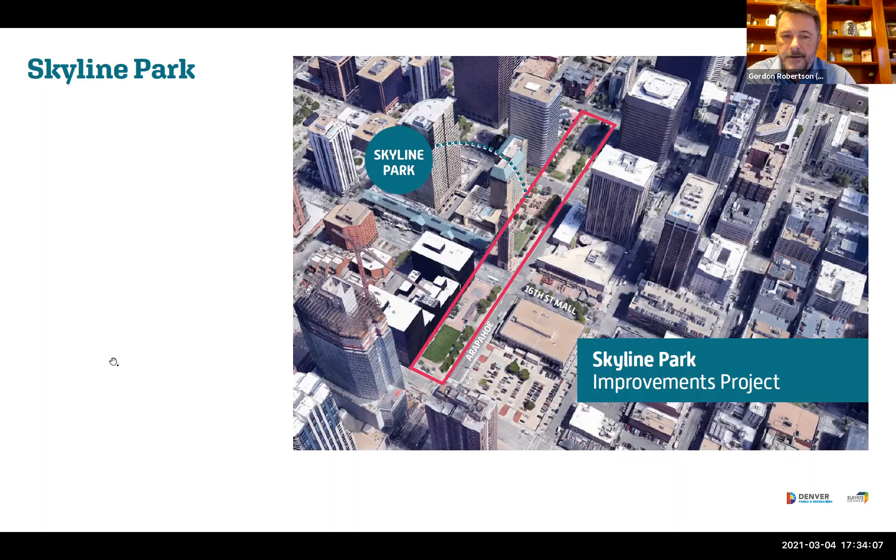When we met in July for the first Skyline Park webinar, we asked you to tell us about what you love and don't love about the existing Skyline Park. We heard from you about what excites you about other urban public spaces in Denver and throughout the world. And finally, we asked you to tell us more about the types of activities and programs you would like to see in the future Skyline Park.

Since July, we have continued to solicit feedback through online and paper surveys. We have conducted additional targeted focus groups to further explore a wide range of program opportunities for Skyline Park. And we have heard you, and our design team has taken the feedback we've received to create a basis of design that has formed the concept options for Skyline Park.

The design team has drafted a series of concept options for all 3 blocks, and we are so excited to share with you this evening the best of these options. The goal for tonight's workshop is to hear from you about what you want to experience on each block of Skyline Park. We will take the feedback we hear from you and other stakeholders we've heard from this week and narrow down the design to a preferred concept option, which we will share with you later this spring at our 3rd and likely final public workshop.

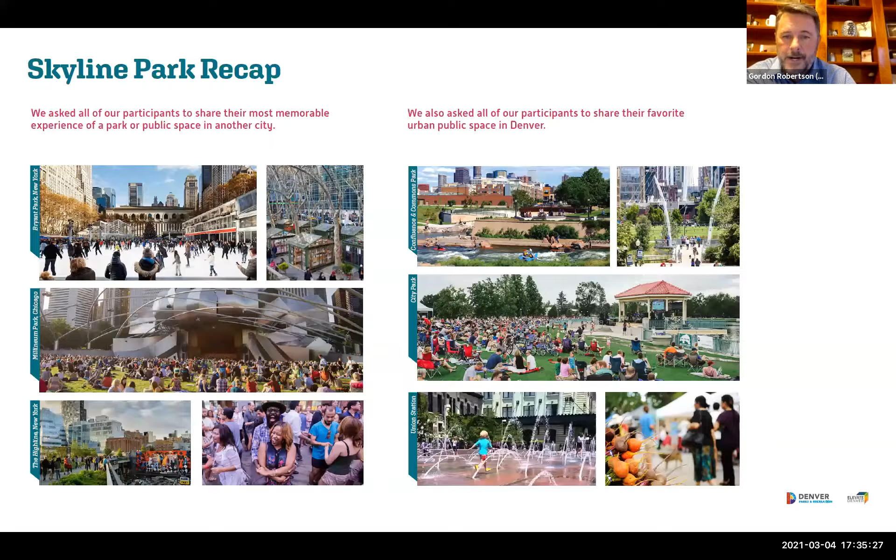Downtown parks are the city's front yard where we come together to celebrate our culture and to enjoy our outdoor lifestyle through play and relaxation. This transformation of Skyline Park is a once-in-a-generation opportunity to reimagine a significant public space within the heart of our downtown. Skyline Park has amazing potential to serve our community as a public space with a regional draw, but also as a neighborhood park serving our downtown community and surrounding neighborhoods. We want to hear from you and thank you so much for being here.

Now let me take a brief moment to thank our project partners without whom this project would not be possible. First off, we'd like to thank and recognize the voters who approved the Elevate Denver bond in 2017, which has made funding for the Skyline Park Improvement Project possible. And we'd also like to thank the Elevate Denver Bond Program, Council District 9, and the Mayor's Office for their leadership in getting us to where we are today. We'd also like to thank Denver Departments of Transportation and Infrastructure, Community Planning and Development, and Arts and Venues who are very much involved in this project. And lastly, we'd like very much to thank the Downtown Denver Partnership and the Denver Theater District for being such great partners on this project with us.

My last thing to do tonight before I turn it over is to introduce the project team. I always start with our fearless leader, Happy Haynes, our executive director. She is the leader of this project in many ways. Also, Craig Coronado and Jenna Harris are our project leads in the Planning, Design, and Construction Division of the department. Laura Morales and Jesus Orantia with our community engagement team in Denver Parks and Recreation are key partners on this. And lastly, and maybe most importantly, our design team, Rios.

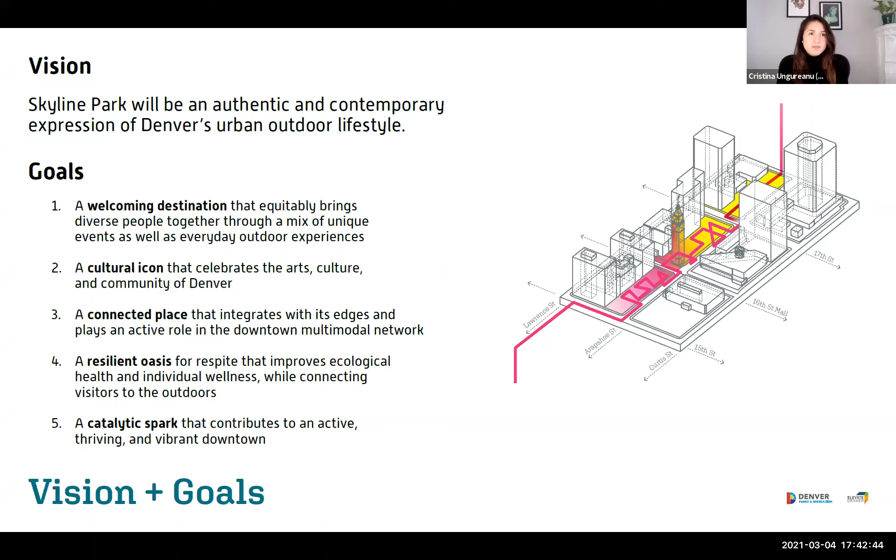So we'll ask ourselves, as we're thinking about a design or discussing a design concept with stakeholders, does this choice serve these goals and in what way? We know different solutions will amplify different goals differently, but in the end, we want to make sure we always come back to this vision and this set of goals as our guiding touch points.

For the future of Skyline Park to thrive, our focus is people. Who uses the park today? How is the user base going to change over time? And then who else can we attract to the park in the future?

From the outdoor downtown plan, we know that Skyline Park currently serves the following spectrum of users: residents, employees, students, visitors. And the map on the right shows the continued growth of office, hospitality, and residential uses in downtown, which is only going to further amplify that dynamic mix of users coming to Skyline Park.

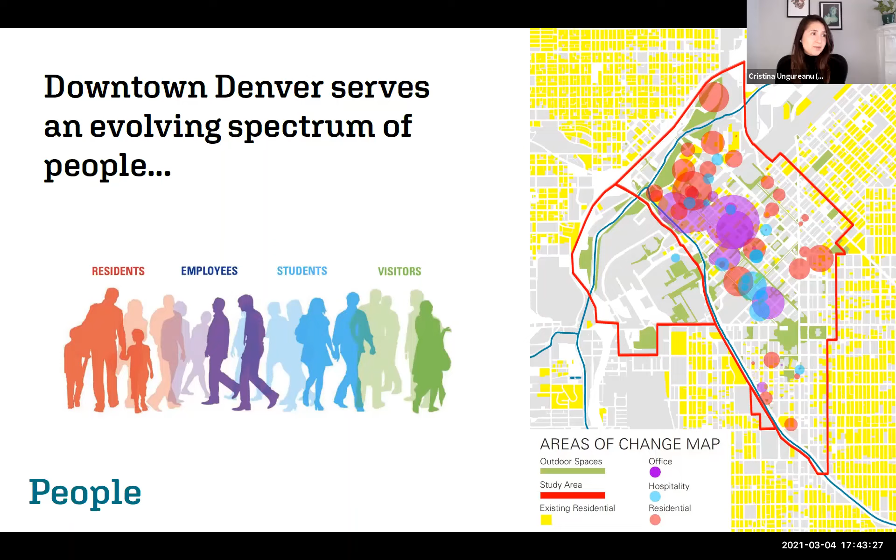We believe that because of its central location in downtown and its tremendous access and proximity to transit infrastructure, Skyline is uniquely positioned to serve a broader user base as one of the only parks in the central business district.

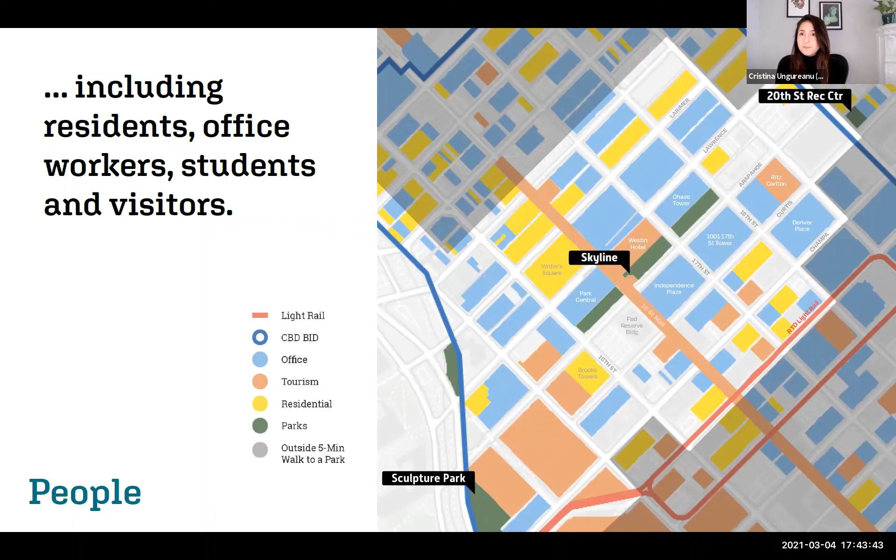We also believe in the role that Skyline Park can play in fostering a more diverse audience. While we are keenly aware that most of the racial and ethnic diversity in Denver exists outside of downtown, the best aspiration we can have as a group here today is to make Skyline a place where everyone feels like they belong.

It's to make that park an iconic experience that you can't get anywhere else. To come to Skyline Park, this audience needs a there, and they need the access and affordability to be able to get there. Even still, we want to recognize that the diversity of the park is going to fluctuate on a daily, monthly, annual basis, while these farther flung audiences are still going to gravitate towards their local parks for their day-to-day needs.

So we talked about people. We also want to think about place. How does downtown Denver set the stage for Skyline's future? We want to think about Skyline Park in the context of all these other great parks in and near downtown that serve a spectrum of user needs and desires.

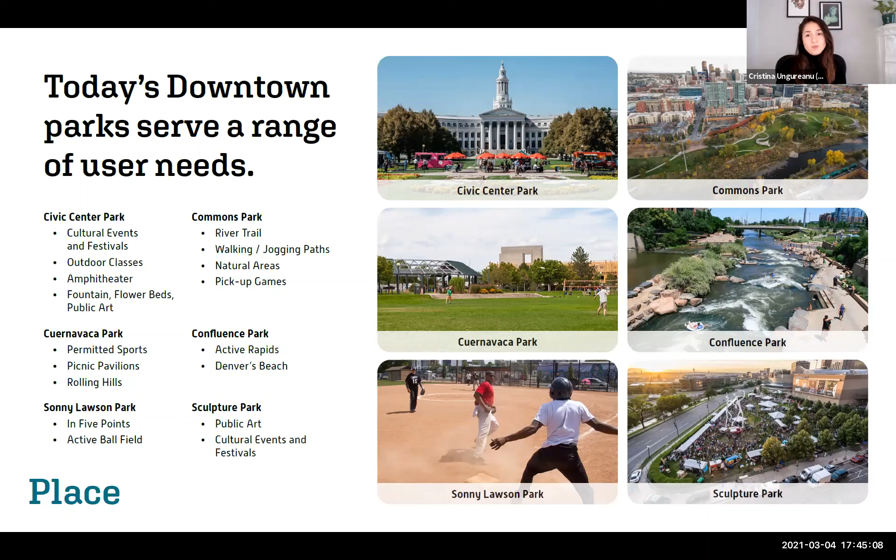From the cultural events and festivals you get at Civic Center to the wonderful waterfront activities at Commons and Confluence, and then to Sonny Lawson in Five Points, which is really the only active ball field in the entire district.

What is missing from this tapestry of open spaces in downtown? We believe one way to take advantage of Skyline's central location is to lift up the iconic experiences happening there and differentiate it as this iconic heart of downtown.

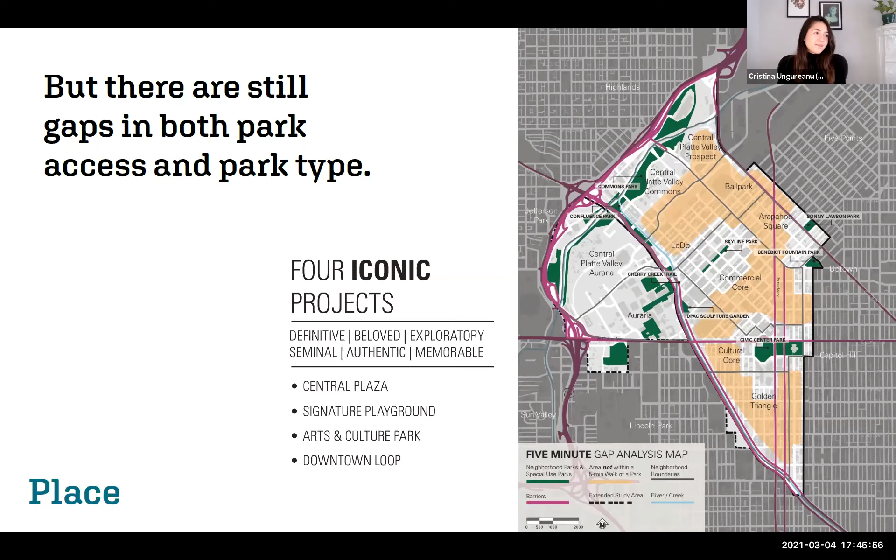Overall, we think Skyline Park is really well situated to fill these gaps, but it faces three overarching urban design challenges. First, it suffers from its urban renewal past, so it's disconnected from the rest of the city in many ways—its surrounding context as well as each block is disconnected from the other.

Second, because of its piecemeal evolution, the three blocks are disconnected internally as well—there are numerous internal barriers to movement and challenges to wayfinding. And finally, as we confirmed through workshop 1 and the numerous stakeholder touch points throughout last year, Skyline is still lacking the amenities and experiences to welcome that broader audience base.

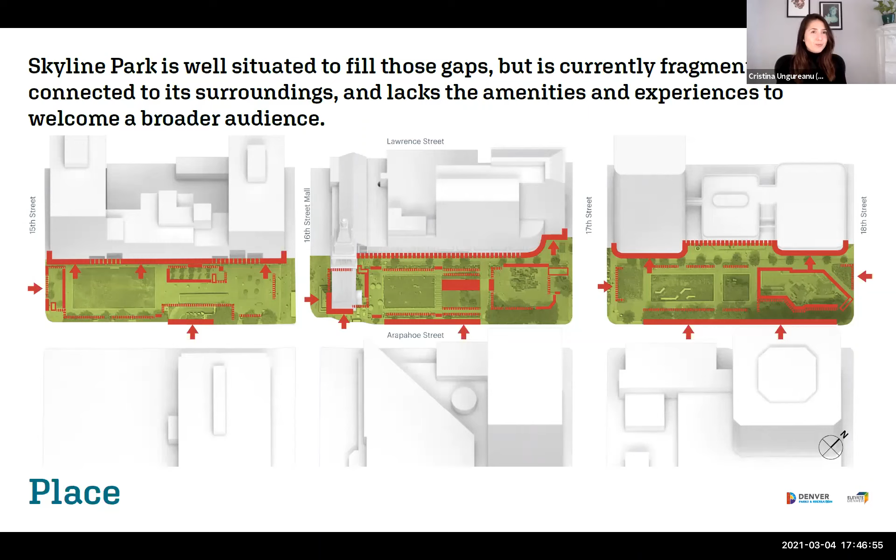So I've gone through the challenges and we want to talk about what we can do about it. I'm really excited to introduce Nate, who's going to take us through the approach we're taking to address these issues. Thanks, Nate. Right, thank you, Cristina.

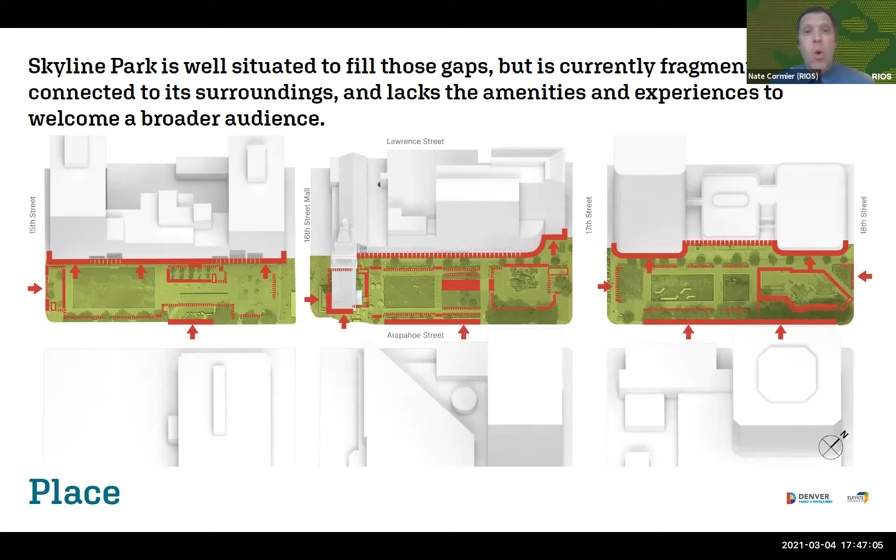Once again, I am Nate Cormier, a landscape architect at RIOS, and I'm going to first walk you through what we call the basis of design. This is a summary of 3 fundamental principles for Skyline Park that have emerged from our analysis, from your feedback at the first round of workshops, and from many conversations with project stakeholders in and out of the city over the last 9 months. Then I'll introduce the concept options that build on and offer various ways of fulfilling this basis of design.

The first principle is that Skyline Park should be unified. As Cristina noted, the park has numerous physical barriers, changes in elevation, and complications from its patchwork history that render it almost invisible as a whole park despite its central location in downtown. We want what we call the urban figure of the park to extend from building face to building face across Arapahoe and all the way from 15th to 18th Streets.

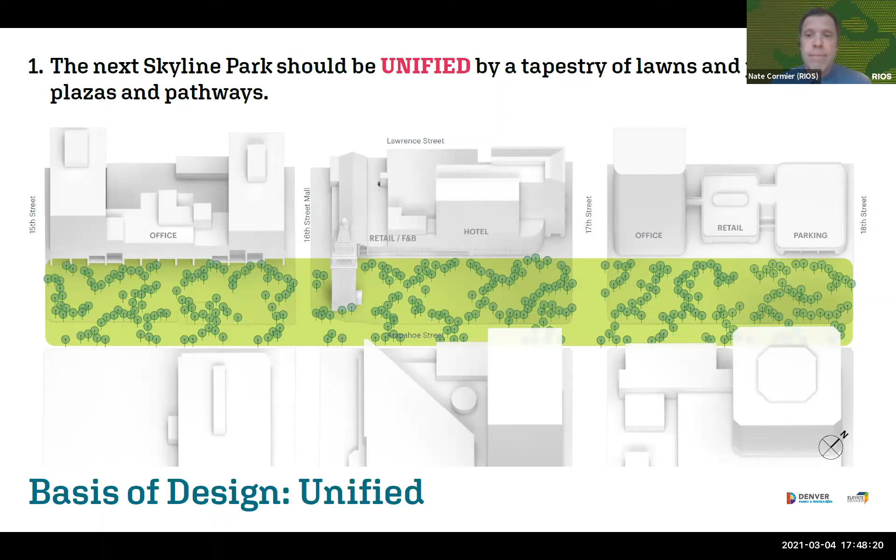We envision a tapestry of lawns and plantings, plazas and pathways that form the continuous fabric of the park. This is also an opportunity to weave rain gardens, the urban forest canopy, and other green infrastructure throughout the park. No matter which particular programmatic destinations we end up building, these are the elements of continuity that will stitch together the 3 blocks. And implicit in this idea of unifying is also the understanding that the main circulation routes throughout the park should be brought up to a common elevation with surrounding sidewalks to allow universal access and intuitive wayfinding.

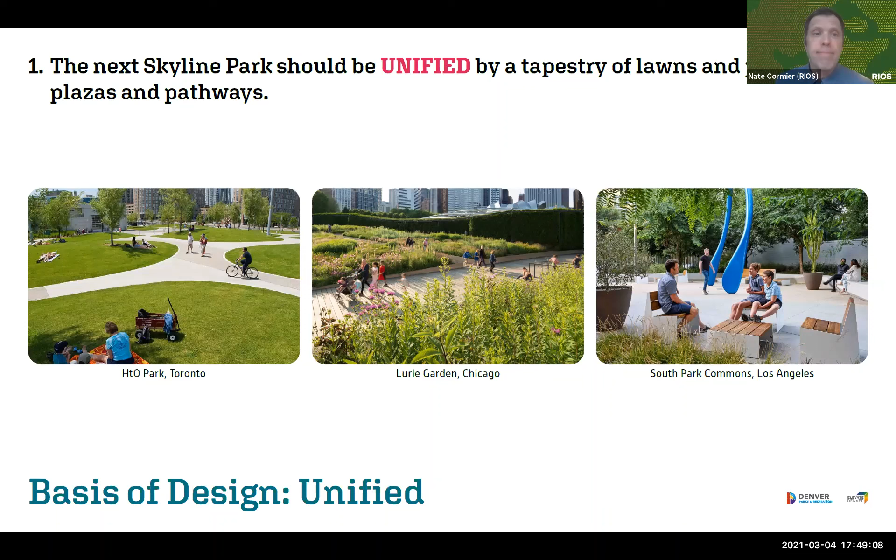The second principle is that Skyline Park should be fully connected with surrounding streetscapes and ground floor uses. Its corners should be inviting gateways, its edges should be porous, it should be a mobility hub easily linked to transit and bike facilities, and surrounding buildings should contribute to animating the park.

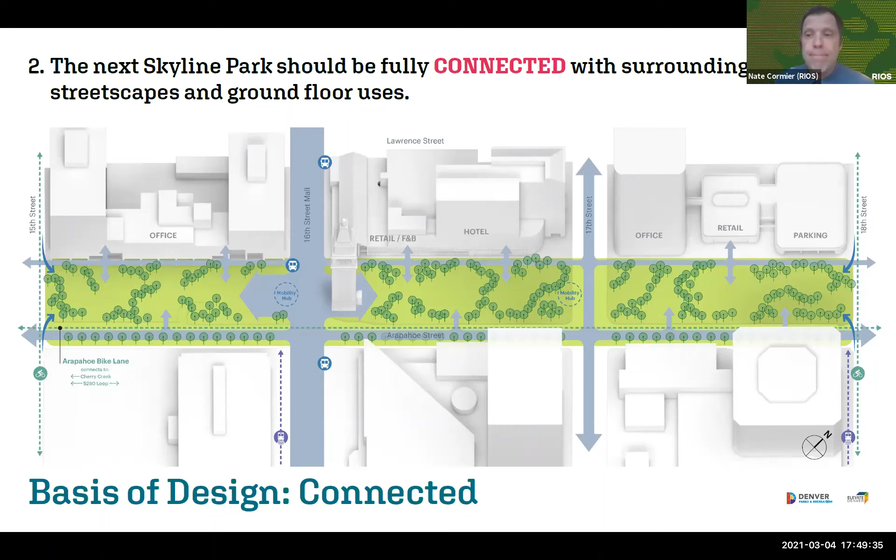The north edge of the park could be a broad promenade, indicated in green, to allow generous access to adjacent buildings while making space for cafe seating and retail displays in support of these kinds of animating ground floor uses.

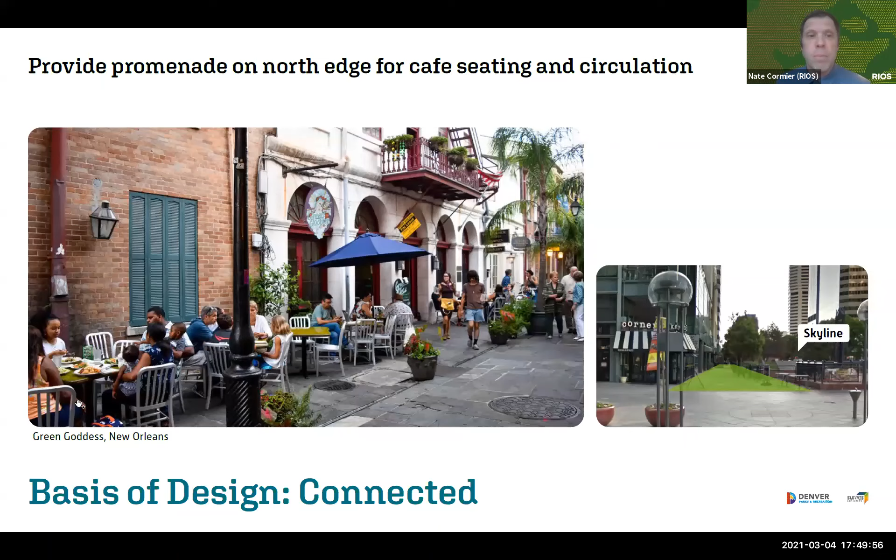We should also work with adjacent property owners to open up into the park with more engaging lobbies, outdoor workplace amenities, and greater transparency between indoors and out. In green, you can see a number of adjacent building conditions that could be improved to better engage the park.

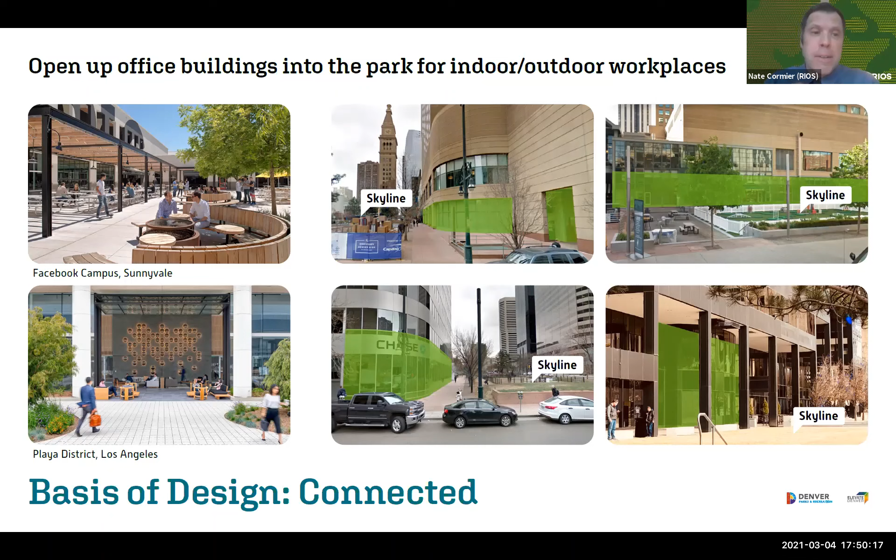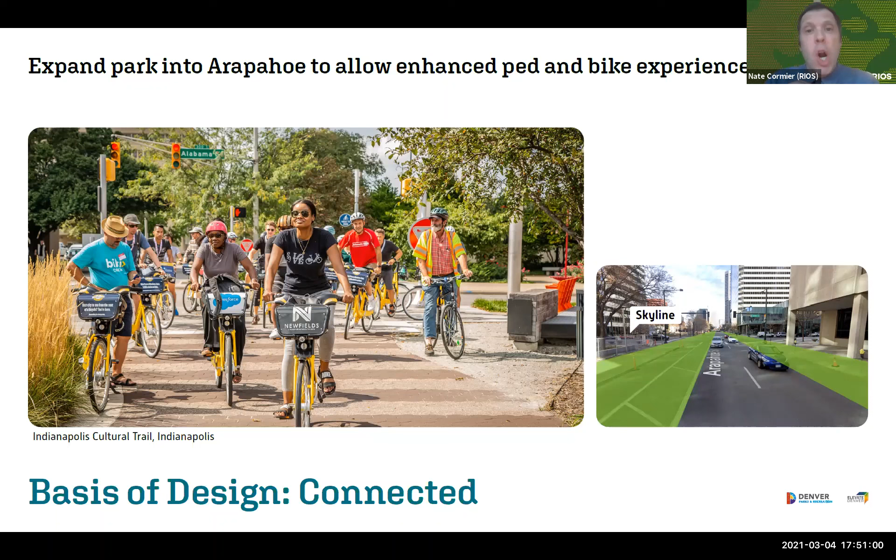The third principle of the basis of design is that Skyline Park should offer a spectrum of experiences to attract a diverse community. Christina discussed the unique position of Skyline Park in terms of the range of audiences it must serve: its neighbors, office workers, students, residents in the rest of Denver, as well as convention goers and other out-of-town visitors.

As we studied the 3 blocks, it became apparent that each has complementary assets and that we can think of each block as having a different purpose to fulfill so that taken together, there's something for everyone at Skyline Park.

Block 1 has traditionally hosted most of the park's large community gatherings. It's next to the 16th Street Mall, and it has few trees and other structures since it was built over a parking structure. We can amplify this gathering role by imagining ways to make it more of a draw with unique art, culture, and special events that would make someone want to visit Skyline Park from around the region.

Block 2 has hosted the beer garden and ice rink pop-ups. It also can draw people in off the 16th Street Mall, and it has the most food, beverage, and hospitality uses to animate its edge. If someone's spending time downtown for work, for conference, shopping, or a day out, the vibrant social life on Block 2 should make them want to drop in on Skyline Park.

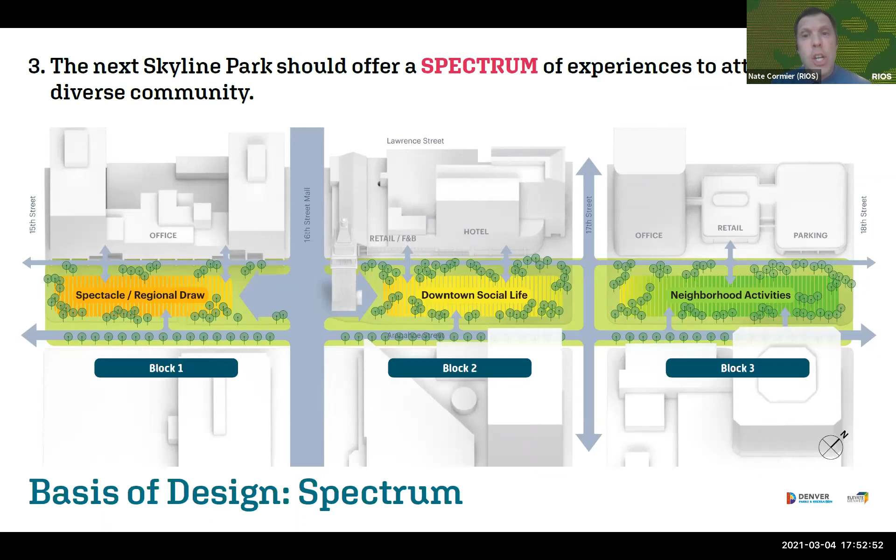Block 3 has been the least visited block historically, with the addition of a dog park finally bringing some steady use. This is where we can satisfy some of the daily needs of park neighbors, such as residents of the Brooks Tower or the Isbell Lofts. People living downtown don't have their own backyards, so for them, Skyline Park can offer that green getaway.

All right, so in the next section, we'll talk about the concept options. We'll reflect on various ways to satisfy this spectrum of desires for Skyline Park.

But first, we're going to pause here, and I think Jenna's going to highlight some of the comments we've received so far.

Great. Yes, please feel free to put your comments in the chat. I have a couple already, including one from John. John would argue that the shape of the park, long and narrow, coupled with the weak edges of many of the adjacent buildings, is also a major challenge.

Joseph has another comment. To be fair, a good chunk of number 3 didn't seem to be of much use because the city has fenced it off currently. Thanks, Joseph. That's a great point, and one we're hoping to address with the new design.

I got another comment from John. He loves the idea of expanding the park into Arapahoe Street and across the street. Thanks, John. We do too.

We've got one more from Nicole. She loves the idea of capturing the bike lane into the green space and also expanding the sidewalk on the opposite side of the street.

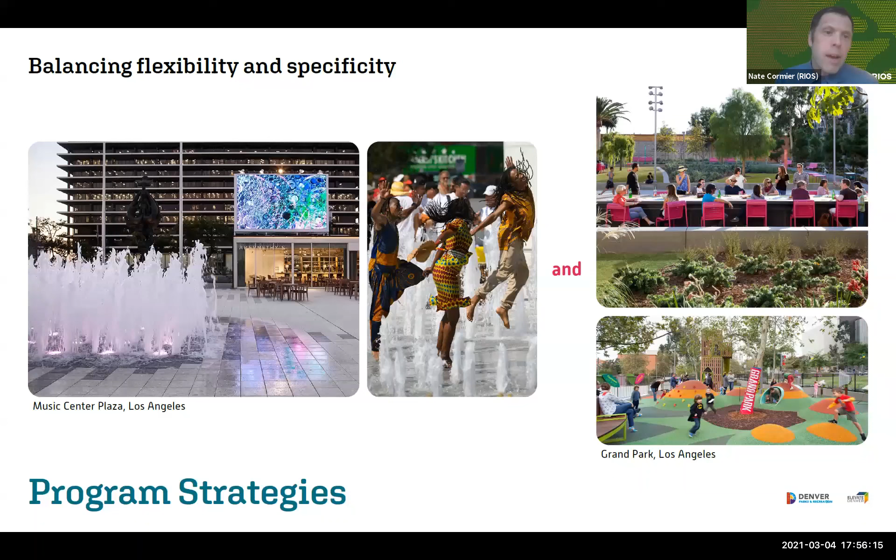And a final consideration is that Skyline Park should serve different audiences at different times of the day and throughout the week or the year. Some experiences can attract the after work crowd. Others can get people out there in the morning or at lunchtime, and still others will draw people into downtown on the weekend. We can coordinate our programming with conventions and other activities happening around downtown.

And seasonally, we want to leverage the existing festivals and events that have taken place at Skyline and hopefully invent new ones to offer more reasons to come back again and again. As you weigh which experiences you want to enjoy there, imagine you're also trying to round out this calendar so there's always something happening at Skyline Park.

All right, on to the concepts. So we're going to roll them out block by block, and we'll begin each block with what's been happening there that we can build on.

The existing block 1, to get us started, has been instrumental in Skyline Park's role as a successful venue for large community events, such as the Winter Christkindl Market and the Shakespeare Festival. We'll definitely want to retain that flexible event capacity on block 1.

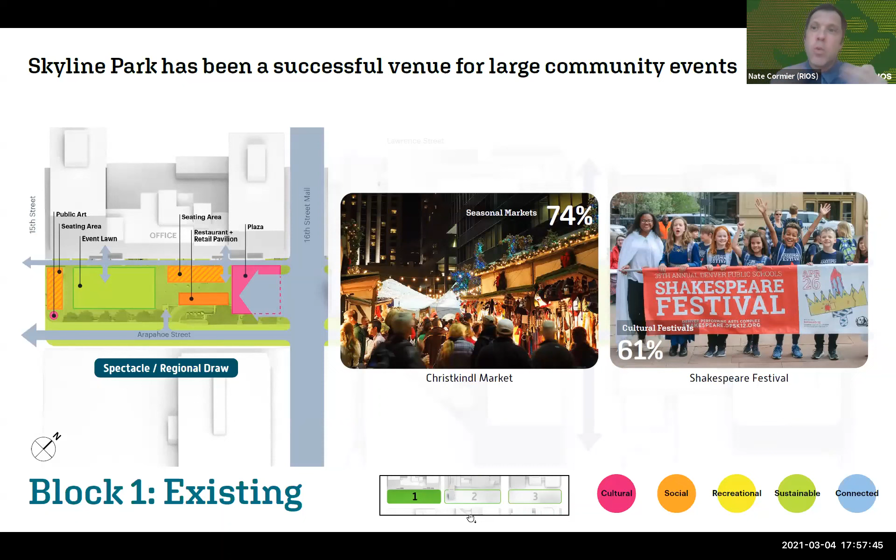These percentages you see on any of the photos refer to how well different experiences scored in the workshop 1 surveys and polling, just so you have that as a reference. What has the public been saying about some of these possibilities?

So looking to the future, option A expands arts and cultural programming with a performance stage and digital display at the west end of the block that could host music and movies, or even e-games or simulcasts from sporting events and performing arts venues around Denver.

At the east end, next to the 16th Street Mall, an arts plaza could host spectacular temporary installations showcasing local and visiting artists. These could have seasonal goals as well, with shade structures in the summer or ice and snow sculpture in the winter.

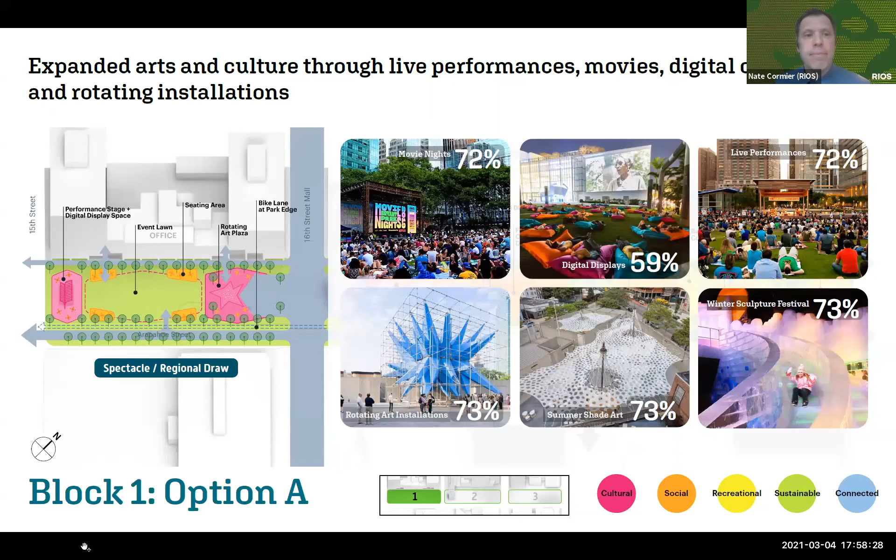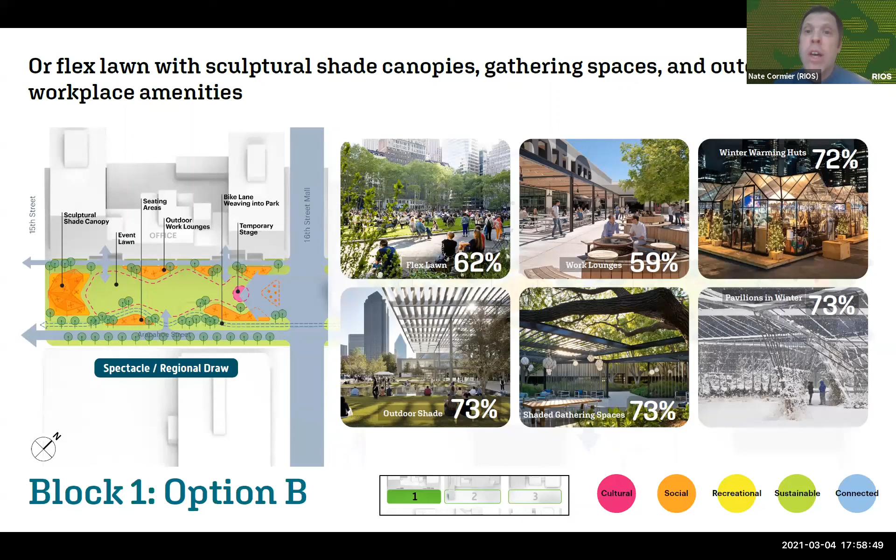Option B elevates more social opportunities with sculptural shade canopies and gathering spaces ringing a flexible lawn. We could add outdoor work lounges with internet, power, and heat to attract office users. We could also put out winter warming huts to allow gatherings of family, friends, and coworkers to take place throughout the winter. And I think Christina's ready with our first poll.

Let us have it. Actually, Laura. All right, it should have popped up on your screen.

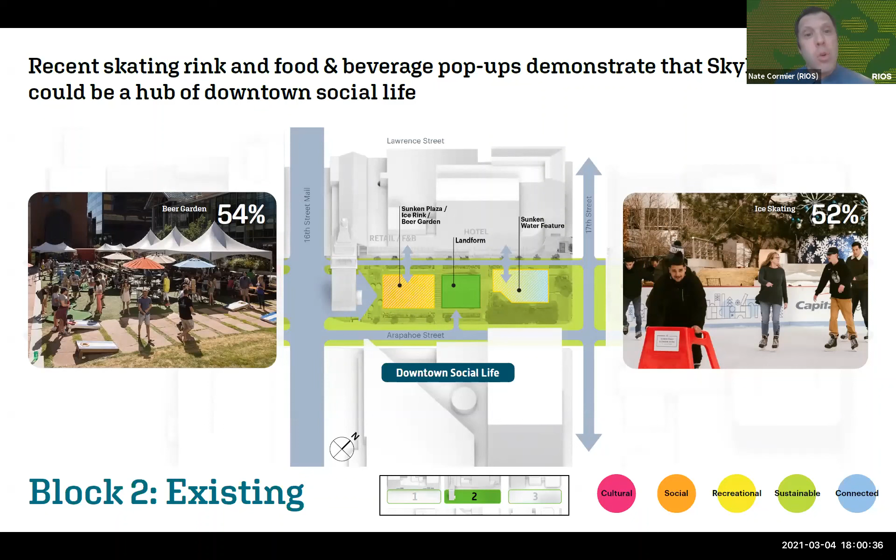Concept option A features an interactive water plaza and ice rink on its western half below the D&F Tower. In the summer, the plaza can draw kids and everyone else to cool off in the water, and we can turn off those jets to allow summer performances with the tower as a dramatic backdrop. In the winter, the plaza becomes a large skating rink and a canvas for digital and light projections, so the skaters become part of the show.

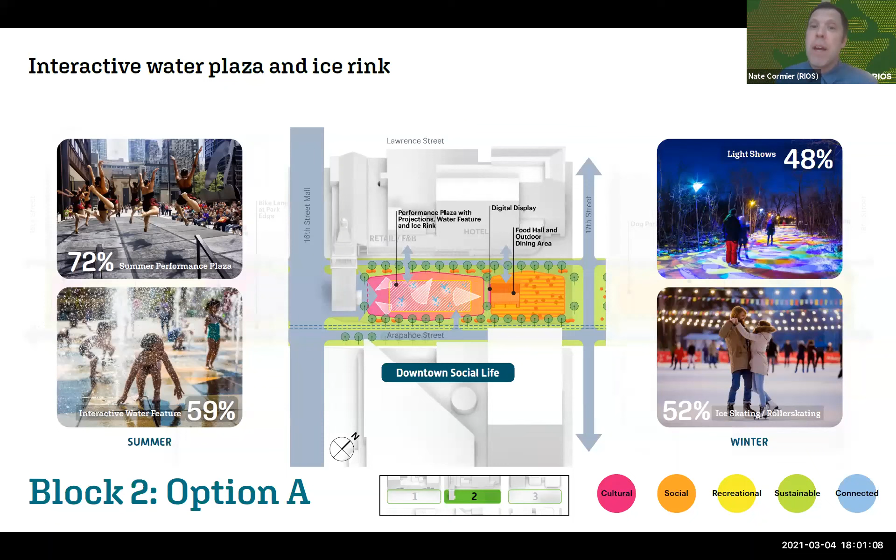This option also has a food hall on the east half of the block with indoor and outdoor dining areas. We could work with independent local restaurants to host kiosks in the hall, and the structure could be designed with movable walls or a retractable roof to make it comfortable in all seasons. This is another great place for one of those digital displays to enjoy things like game days in the park. It's also important to note that while we are considering concessions, any of the seating or gathering spaces would be available for the general public, not just paying customers.

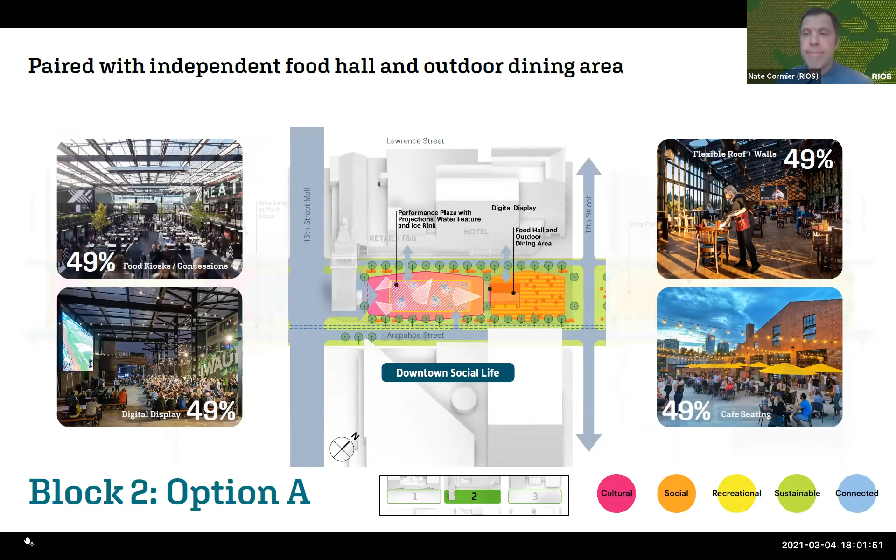Concept option B offers a contrasting approach with a linear skating loop and water feature winding throughout block 2. In this scenario, we could still accommodate a smaller rink plaza in the east half of this figure-8 shape for rink sports like broomball and summer performances.

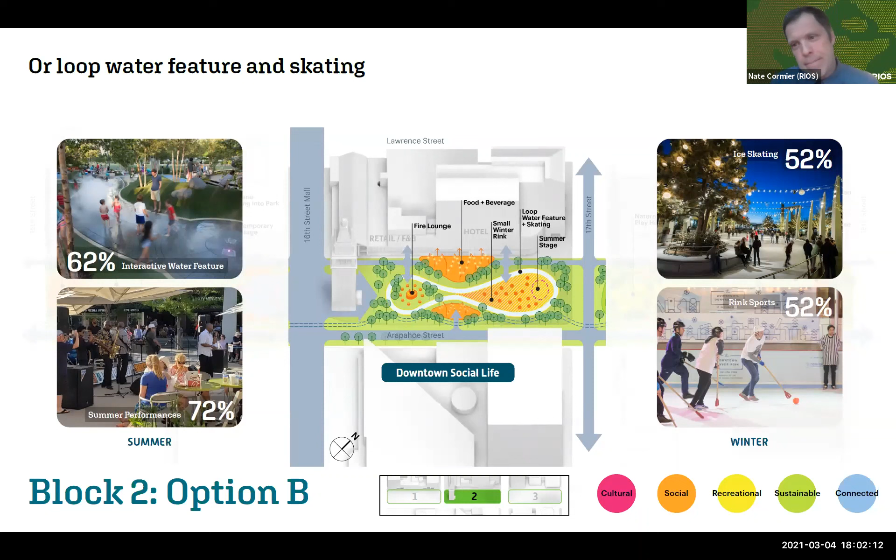This option trades the food hall for a more casual and landscape-integrated approach to food and beverage, with picnic lawns, communal tables, and fire lounges interspersed with the meanders of the water and skate loop.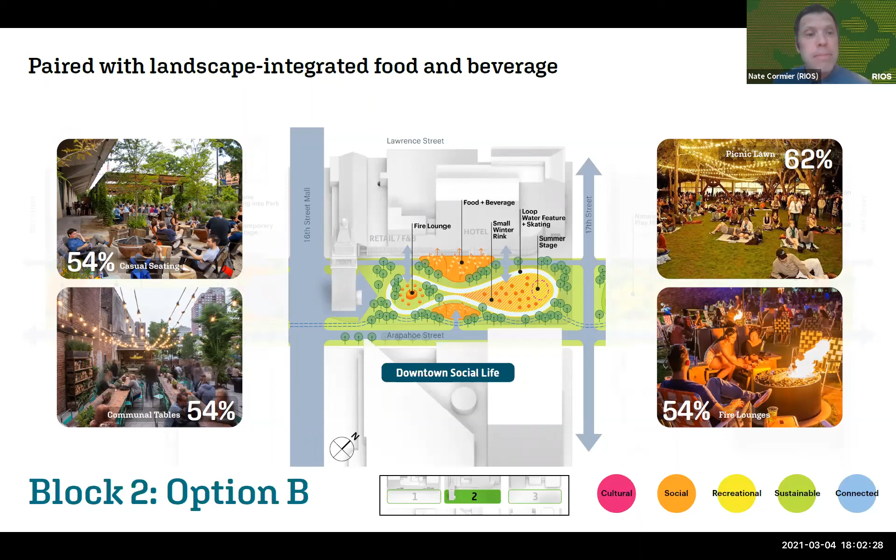I think Laura's got a couple more questions for you. Okay, the second poll popped up.

So this contrasts more of a concentrated plaza rink versus a more dispersed loop with perhaps a smaller rink plaza based in that loop.

All right, put in your last vote. It's a really close one. Okay, I'm about to close it in a few more seconds. All right. Oh wow, you weren't kidding. 33 to 32, the loop is ahead by just a hair. That'll be fun to talk about.

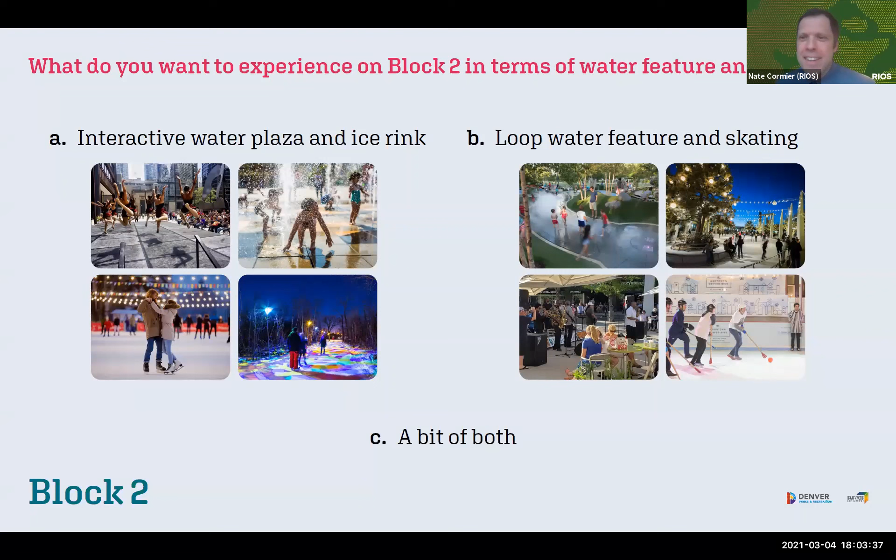And on to block 3. Oh sorry, second question of block 2.

So now we're comparing more of an architectural food hall in the park versus a more casual approach that disperses it throughout the landscape and potentially could take advantage of some of the back-of-house facilities in the restaurant space adjacent to the park. But think more beer garden vibe or more food hall vibe.

Okay, maybe just 10 more seconds on this one. All right, I'm about to end polling, get your last votes in. Here we go. Okay.

All right, so 58% to 32%, the landscape-integrated approach is ahead of the food hall. All right, now we're on to block 3.

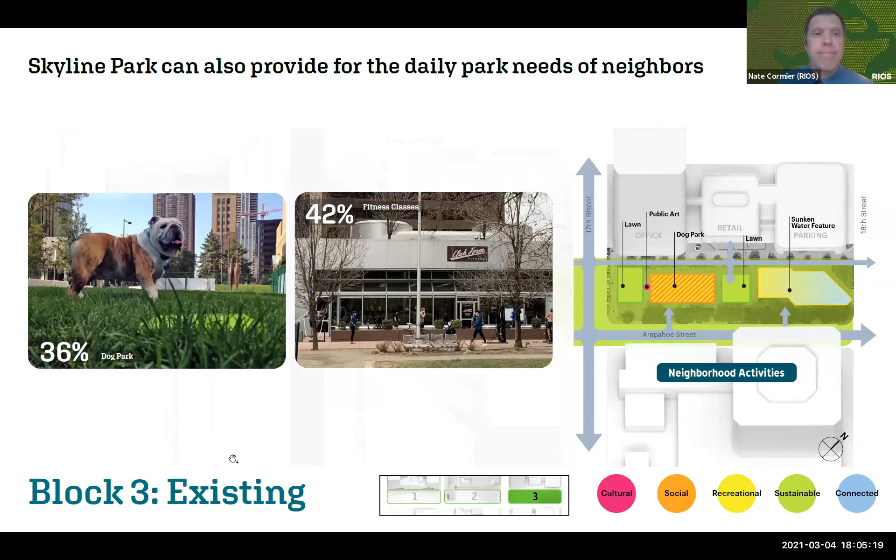So on block 3, the dog park has been the most actively used feature of late, but we're eager to find more ways to attract downtown residents and families to Skyline. Concept option A brings back that dog park and adds more active uses such as sports courts for basketball or pickleball, fitness areas, and perhaps a running track, a bouldering or climbing feature, and in the winter could host a temporary pop-up sledding hill. The 20th Street Rec Center, only 2 blocks to the east, could also leverage Skyline Park as an outdoor setting for its program.

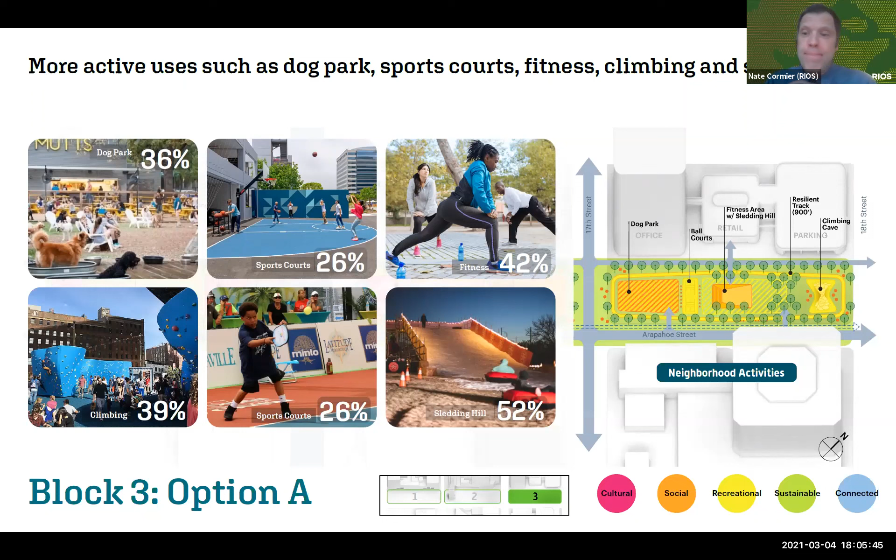Concept option B offers instead more natural respite from the city with shady hammock groves, nature play, and interpretive nature walks, perhaps in partnership with Denver Botanic Gardens. A greenhouse associated with the gardens could offer a winter hothouse for growing and a warming hut to get out of the cold.

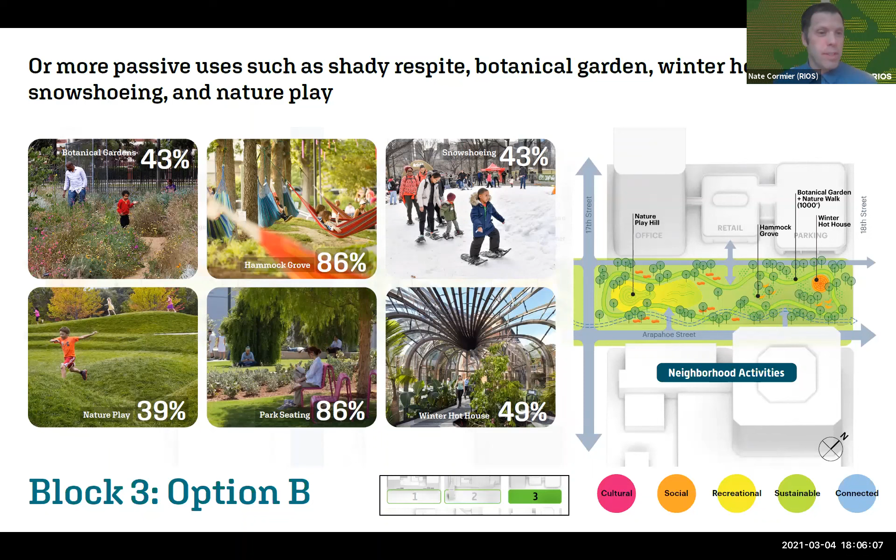Laura's got our block 3 poll coming at you. Okay, that just launched.

Is this more of your green getaway, or is it the place you want to go for more active recreation and wellness opportunities?

All right, it's slowing down a bit. Get your last votes in. Okay, I'm going to give it about 5 more seconds.

Laura, I don't see these either. Each one of these, there's some suspense. I know, I've got all the power. All right, get your last vote in, we're maybe one or two more missing.

Okay, I'm going to go ahead and end the polling. Sorry if I rushed you.

The more of the green getaway option is ahead slightly, 44% to 40%, with some folks wanting a bit of both, and we look forward to hearing more from them.

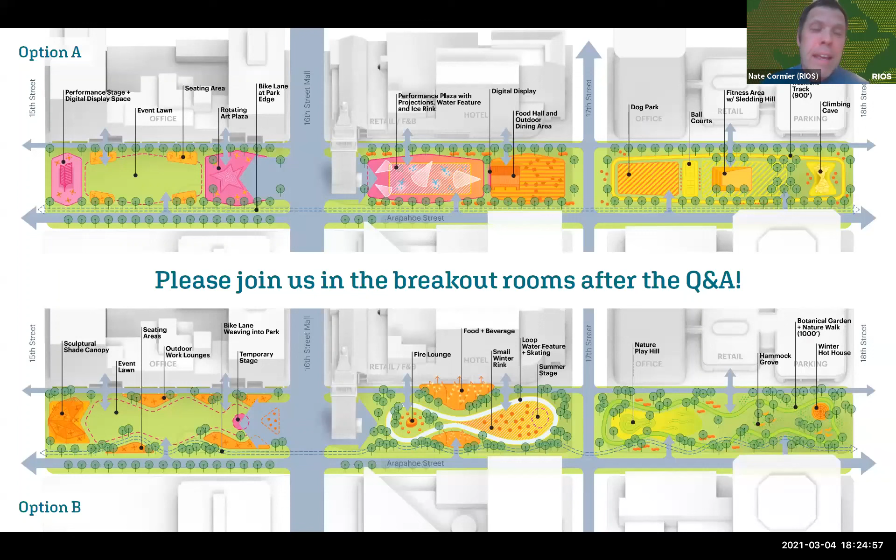It'll be part of the evaluation of trade-offs for both the experiential qualities of it and the long-term maintenance considerations, water use, etc. We've used both on different projects. For Grand Park in downtown Los Angeles, which also hosts lots of events, they made the decision that they wanted to stick with real grass, but that means that after those types of events, they make it part of their maintenance regime to replace it. I think we'll have to have that conversation with parks — is that the approach we want to go with here versus considering artificial turf?

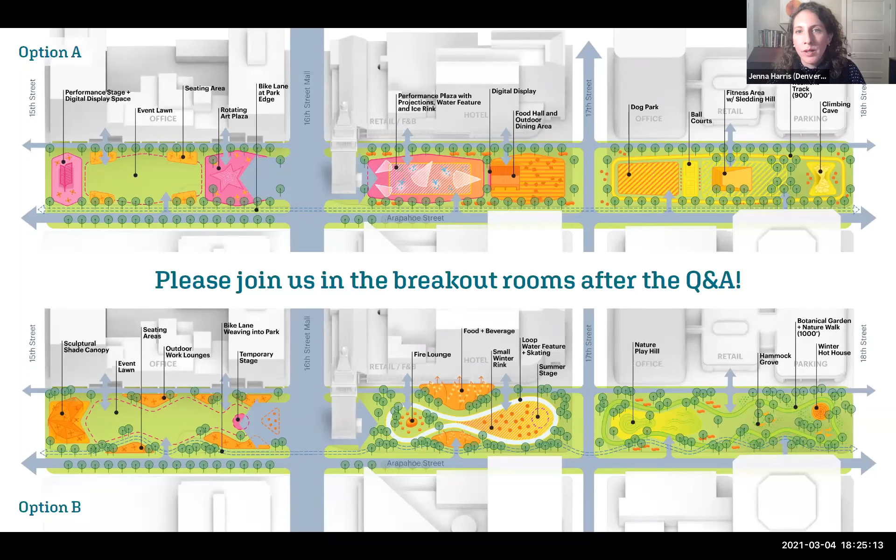Great, thanks, Nate. I think with that, we are out of time for the Q&A. Please do continue to add your questions. We will be capturing all of them and following up on the ones we weren't able to answer tonight. So thank you so much. There are a lot of really thoughtful questions, and our apologies that we can't answer them all here tonight.